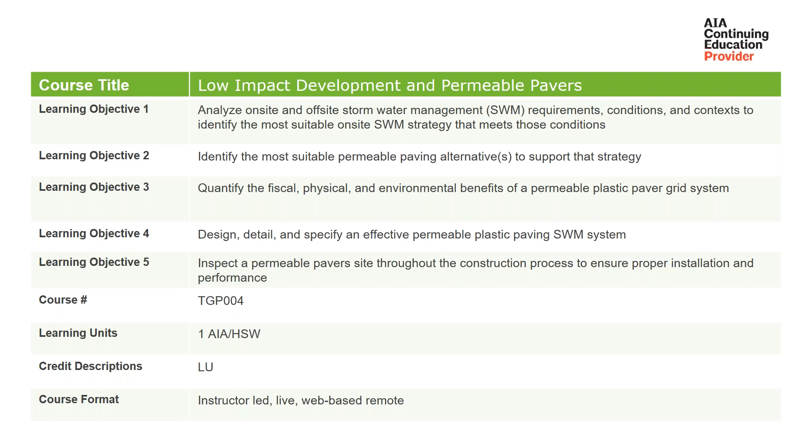Hey, Dustin, I believe you're muted again. Something is going on, I do apologize. I'm getting muted here. I'll keep this. I'm not sure why that's happening.

This is an AIA HSW credit session for 1 hour. Today we'll talk about permeable plastic pavers. We'll look at the health and safety aspect of how they affect the lives and safety of both aquatic life and humans, cleaning the water with bioremediation and other techniques. We'll look at the detention and stormwater detention application of plastic permeable pavers, examine the codes and standards surrounding their use, and look at the cross-section and installation of how we put plastic permeable pavers in most commercial and residential situations. We'll take a look at the advantages of permeable plastic pavers versus other technologies and other stormwater management and LID strategies, look at some case studies, and then wrap it up with hopefully enough time for questions.

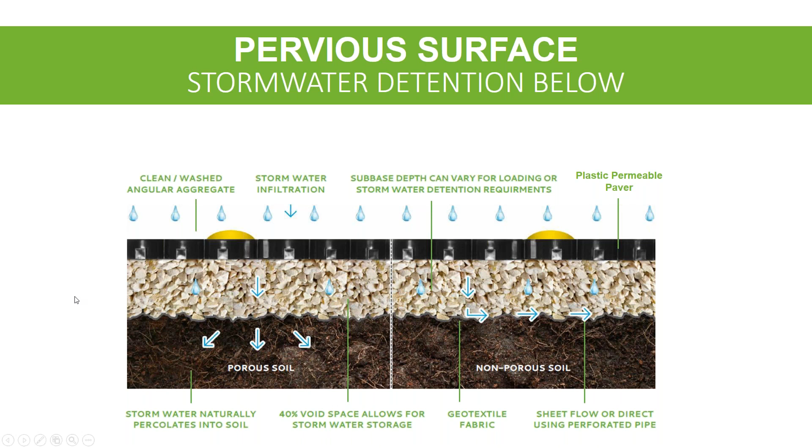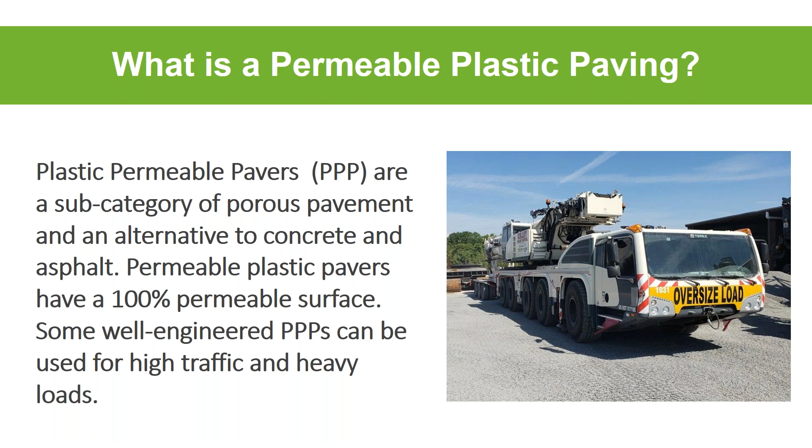Permeable plastic pavers are a subcategory of porous pavement. Since 2016, CSI has recognized us as a separate category, and the correct plastic permeable pavers can be used in heavy load situations, so they're not limited to light duty anymore. There are certain manufacturers and certain systems out there that can accommodate heavy loads and heavy frequency of traffic, so there are a lot of permeable plastic pavers available.

We'll talk about what makes a good permeable plastic paver. There are modular and rigid systems, modular sections, rolled sections, and a lot of different manufacturers out there, and we'll touch on some of the most important components that make your system long lasting.

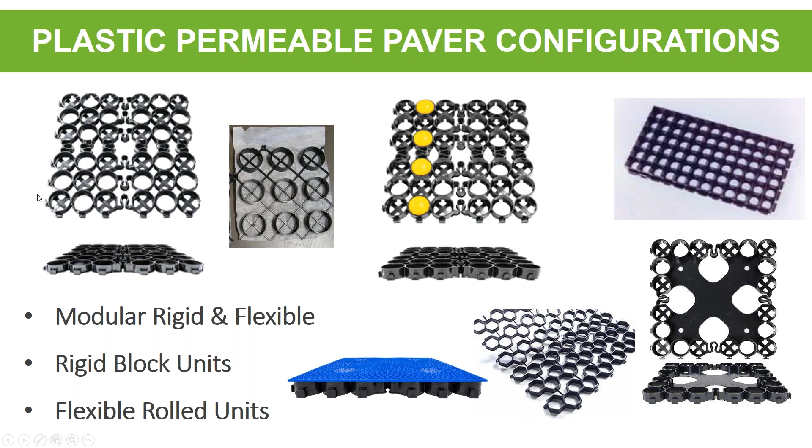A lot of the permeable plastic pavers out there have built-in connectors. This particular one is built in right into the joint without having to use added connectors or third-party systems to connect that.

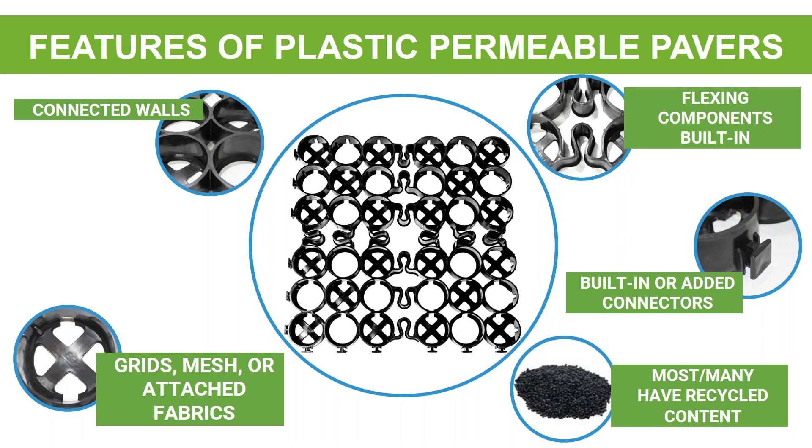Permeable plastic pavers, especially when used with a stone fill or gravel fill, will oftentimes have a grid on the bottom, mesh or attached fabric, and that will help anchor the product down to the base course and prevent any movement. Many manufacturers out there use at least a percentage of recycled content in their resin to get some of those LEED points, which I'll discuss in a little bit.

A permeable plastic paver has a nice focus on safety through the reduction of flooding. You can look at, in many cases, 100% infiltration through the entire surface of a permeable plastic paver. Many of them with stone fill can have very, very low runoff coefficients. In certain cases, you can have a 0.0 runoff coefficient, and even in the worst rainfall amounts, only 5% of that water will convert to runoff. In conjunction with limiting the runoff, that will reduce the off-site water velocities and volume, so all that water is infiltrating right into the system itself.

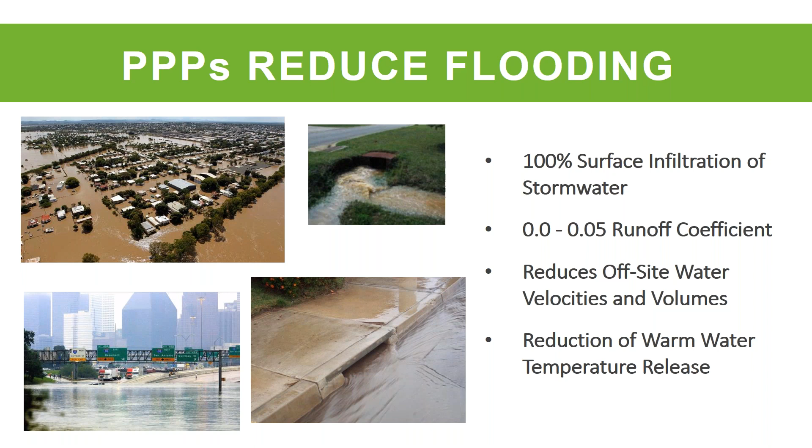With the use of these cooler surfaces, stone fill and grass fill, you have reduced the temperature of that water off-site, decreasing the detriment to aquatic life, so that hot water is not adversely affecting aquatic life downstream.

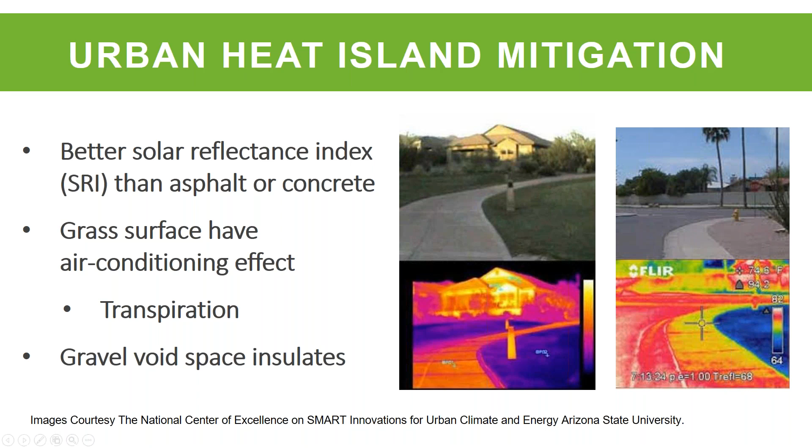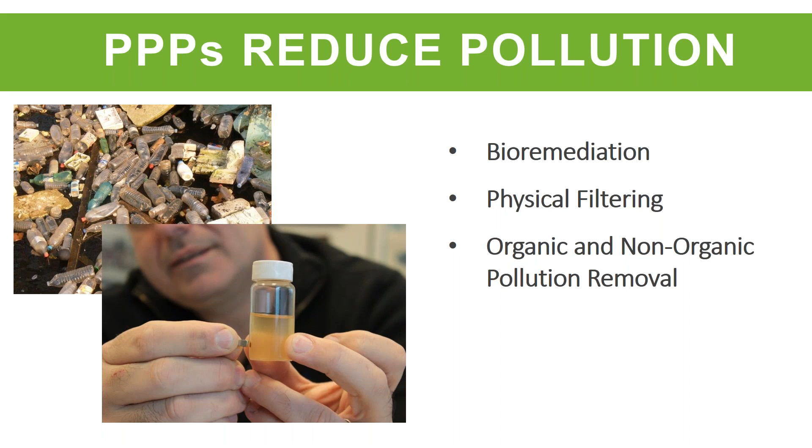Permeable plastic pavers are one of the more effective ways, which I'll get into in a little bit, of removing pollutants from stormwater through bioremediation and through actually physically filtering the contaminants. They remove both organic and non-organic pollution from stormwater.

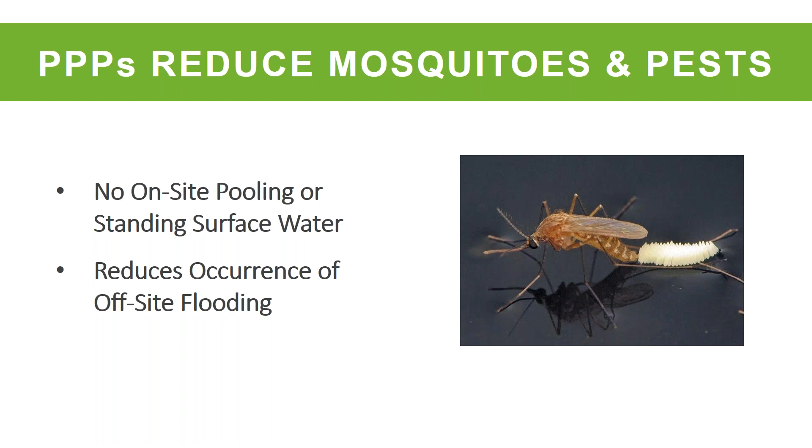Another nice benefit in that health and safety realm would be reduction of waterborne pests such as mosquitoes. There's a great reduction in the pooling of water on site, not garnering the habitat that would promote growth of these pests. It also reduces the off-site occurrences of pooling water, therefore reducing mosquitoes and other pests.

Detention ponds are a very traditional way of looking at stormwater management. They are very high maintenance in comparison to a permeable plastic paver.

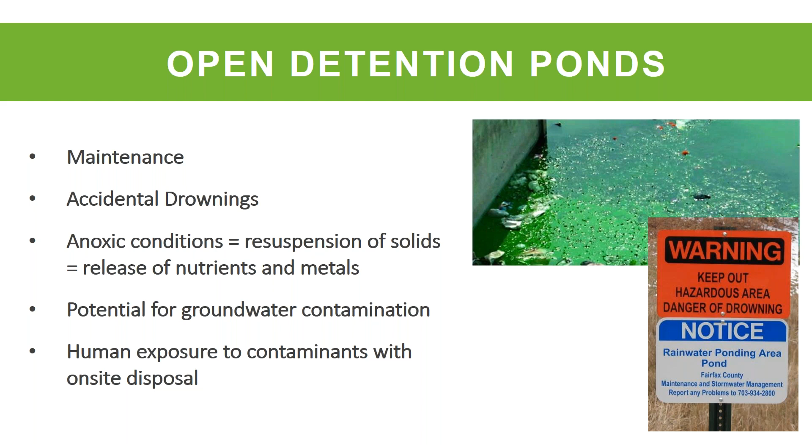There's safety issues, insurance issues, contamination issues for the well-being of both humans and animals, aquatic life. So one major factor in the use of permeable plastic pavers would be the reduction of these detriments via normal use of a detention pond.

Some other primary drivers of permeable pavement would be the environmental aspect and certification. With LEED and other certification methods, there can be a great reduction in stormwater runoff, comparing pre-development stormwater runoff versus post-development runoff. We can manage that stormwater, reduce the amount, and filter it. So that stormwater quality and volume is managed right within a plastic permeable paver, meeting the regulations on post-development versus pre-development runoff through both national and local jurisdictions.

Many designers and customers really like the aesthetic value of a plastic permeable paver with a grass fill or a decorative stone fill.

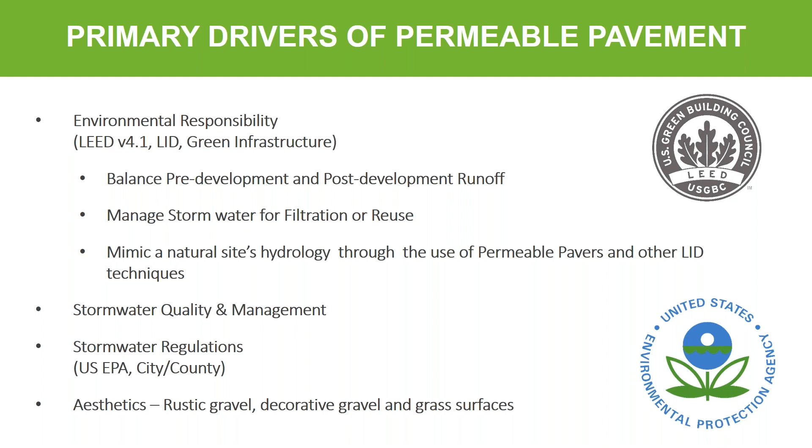As a low impact development best management practice, you have a lot of choices out there - detention basins, grass swales. But what I want to emphasize is that a plastic permeable paver is really best in class at removing those common pollutants: your hydrocarbon drips, suspended solids, normal landscape type chemicals, and even some metals.

If you're going to start with a low impact development best management practice, I would encourage you to look at a plastic permeable paver. It is best in class when it comes to water quality. You can certainly link these plastic permeable pavers to the other best management practices, and we would encourage you to utilize any of these other practices on site. But when you start, you may want to start with a plastic permeable paver.

Along with that last slide, there was a study by the University of Washington that confirmed the previous slide. In comparison to asphalt, a plastic permeable paver system had no traces of motor oil, diesel fuel, or lead, and of the soft metals, copper and zinc, they were very, very low levels. So this plastic permeable paver system, studied in this 6-year example, very well outperformed what you'd see in hard surface pavement.

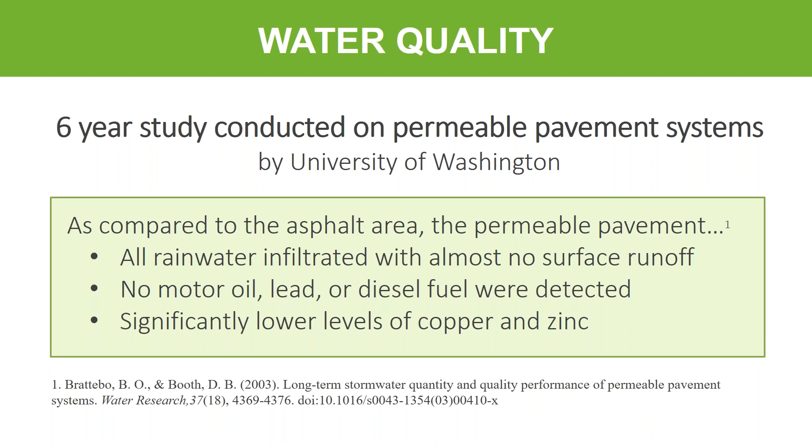With a plastic permeable paver, you can certainly optimize your land use on site. So in the image on the left, you would have a conventional system where you have your buildings in that orange color, your parking lot with traditional impermeable paving, and then a detention pond.

Well, with the use of a permeable paving system, you can reclaim that land that would normally be used up by a detention pond and put in more paving, a building, or some other structure. So by utilizing plastic permeable pavers, you can certainly optimize that land use on site, which I'll have some examples of coming up.

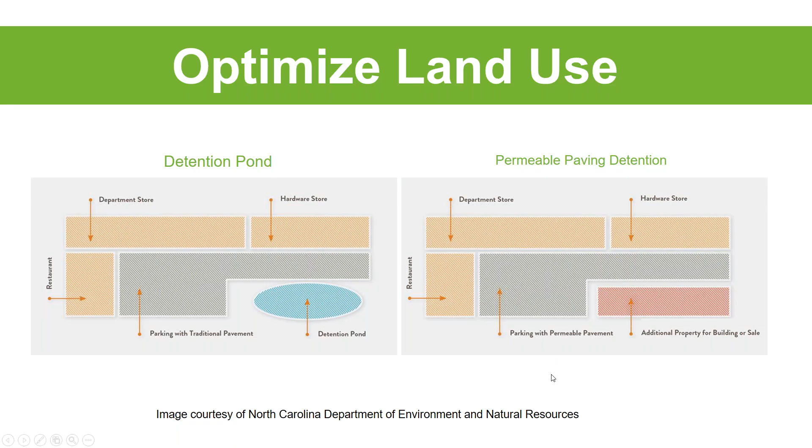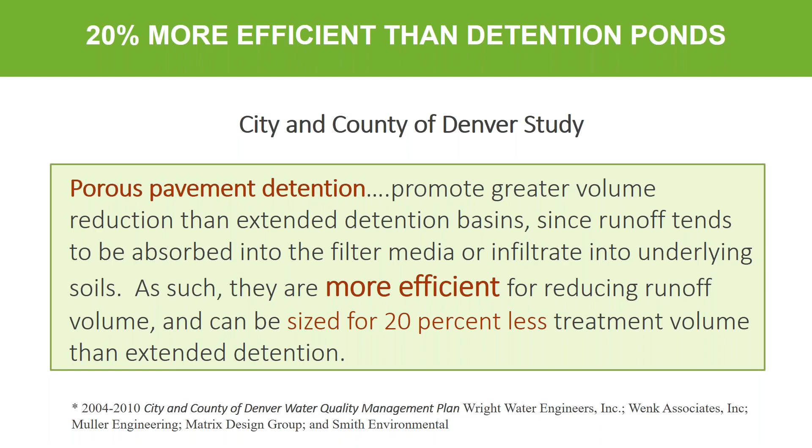In Denver, they did a joint study with the city and county, and they found when you used detention within the cross section of a permeable paving system, you can reduce the volume of water storage that you need. Versus an extended detention basin, they found you can size that stormwater volume storage need 20% less than that extended detention basin. You're not losing water to evaporation or conveyance, and that water is being treated right on site, so there's no need for a larger system.

Many of you may be familiar with an underground piping system to hold stormwater storage. You're looking at pipe systems that, generally speaking, are under asphalt or concrete. In this example, if you are looking at an underground pipe system, there is a lot of excavated volume that is lost and not being used. The area is in that pinkish red color - you'll see the pavement system, the base layer, and the bedding layer. That's all excavated volume required for a pipe system that is not being used for storage.

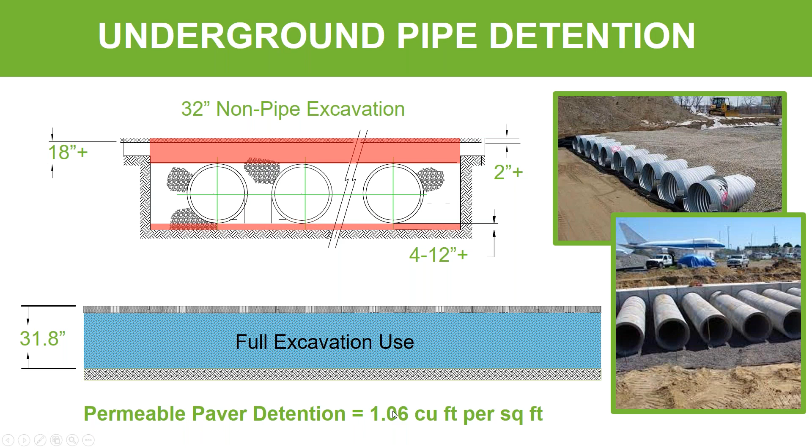Well, if you take that 32 inches of excavated volume for that system, and reclaim it with a permeable plastic paver system, you'll get over 1 cubic foot of water storage per square foot. So by converting this area from a non-porous system to a porous system, you're getting a lot more water storage volume. In one example, this 3,600 square foot parking lot, if you're looking at a round pipe system, you could store about 10,000 cubic feet.

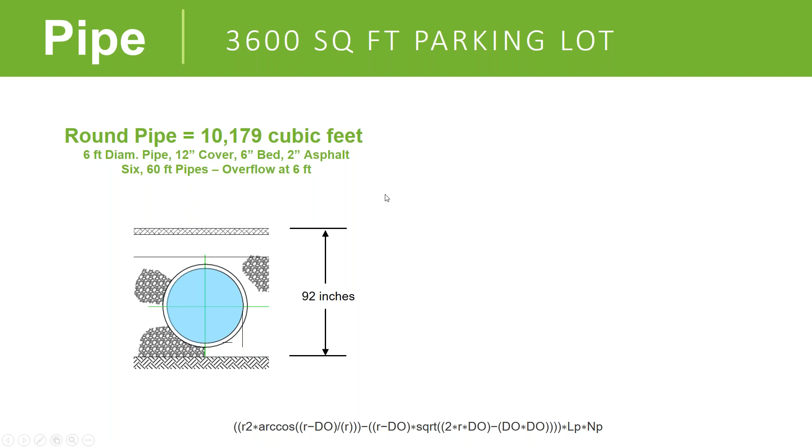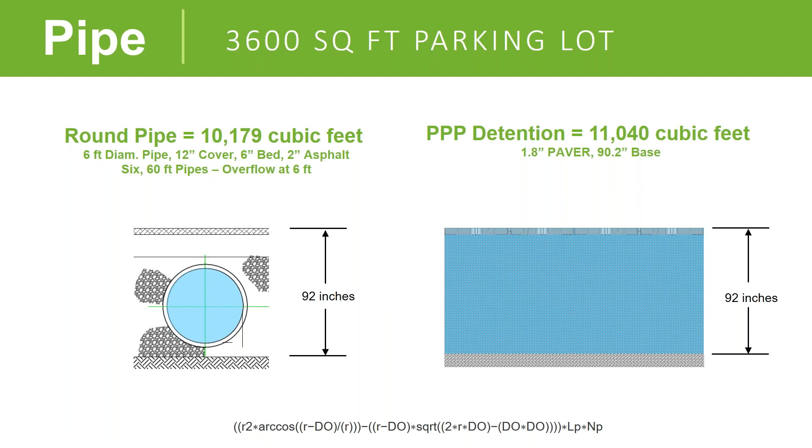Versus if we recovered that 92 inches from this previous slide, you could store more water, get rid of the pipe system, and have a greater impact on stormwater volume storage. In this case, that 3,600 square feet, remember, you're already having to excavate that volume. So reclaim all that volume with a plastic permeable paver, and you'll get an increase in stormwater storage. But you certainly don't have to close that system.

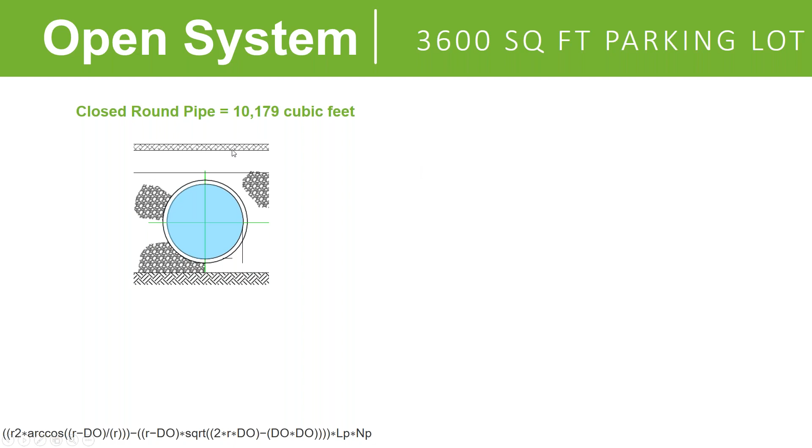There are examples of stormwater storage where a plastic permeable paver can be used in conjunction with an underground stormwater detention system. So in that same example, if you're looking at a 6 foot diameter pipe in that 3,600 square foot, in a closed system, you get 10,000 cubic feet of storage. But if you open that system up with plastic permeable paver all the way down, you'll get a 56% increase in your stormwater volume. You're combining the best of the pipe system and the best of the plastic permeable paving system to get a dramatic increase in stormwater volume storage.

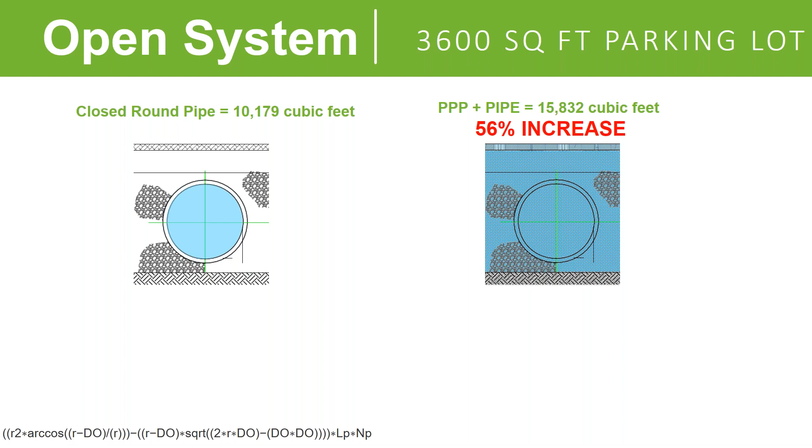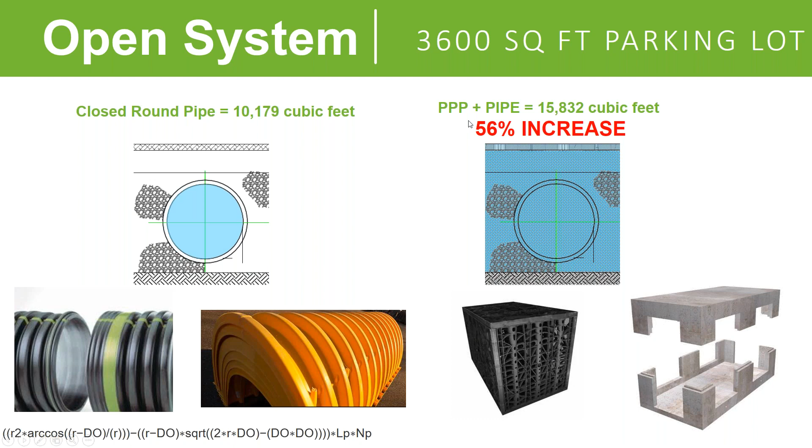And that's not exclusive to pipe systems. You can use arch chambers, you can use modular plastic or concrete systems. Now these volumes will be adjusted per project and per product, but there will be an increase if you work those two systems in conjunction with each other.

A simple calculation for a plastic permeable paver in the detention portion - this is kind of a complicated slide, but it's just saying it's a simple calculation if you're using open graded stone. You'll have your plastic grid paver with your base rock. So all we need to do is multiply the area times the depth times 40% for that open graded stone, and you'll get your stormwater volume of storage in an application. Now this is for a stone infill. This will be reduced to about 20% if you use a grass infill application. We'll get to that in a little bit.

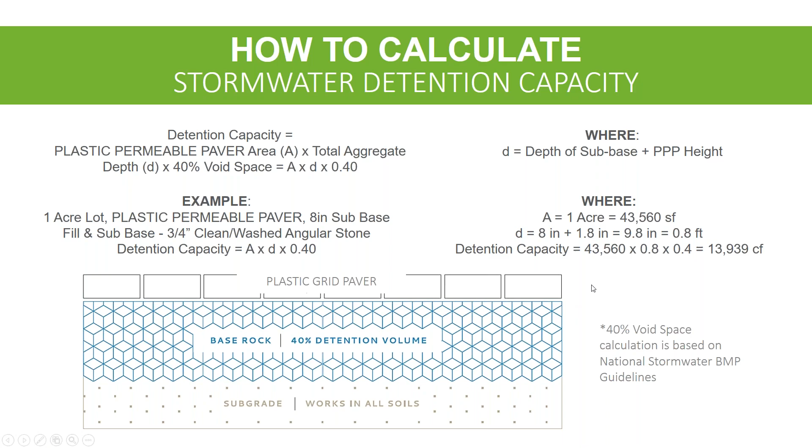In this example, they were using 3/4 inch rock for the fill material, and between 3/4 and 1 inch base rock to get that 40% void space. So almost 10 inches of total cross section, and over 15 acres of that parking lot size, they were able to store 213,000 cubic feet of water in that area - a huge stormwater volume for that acreage. Again, they were able to completely eliminate a detention pond there and have useful space for that inventory lot.

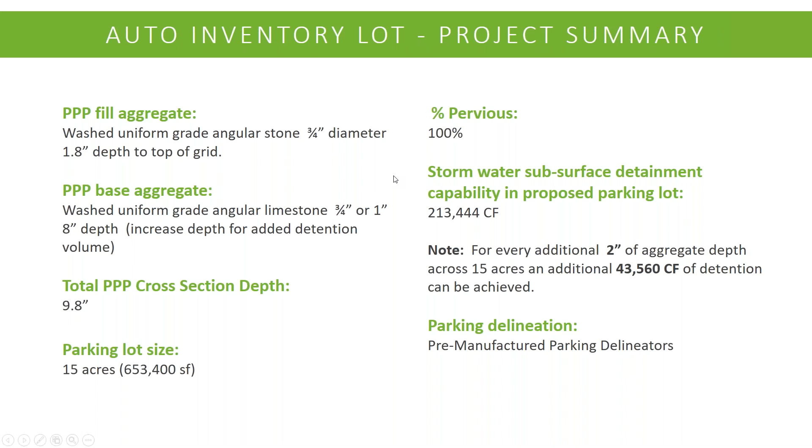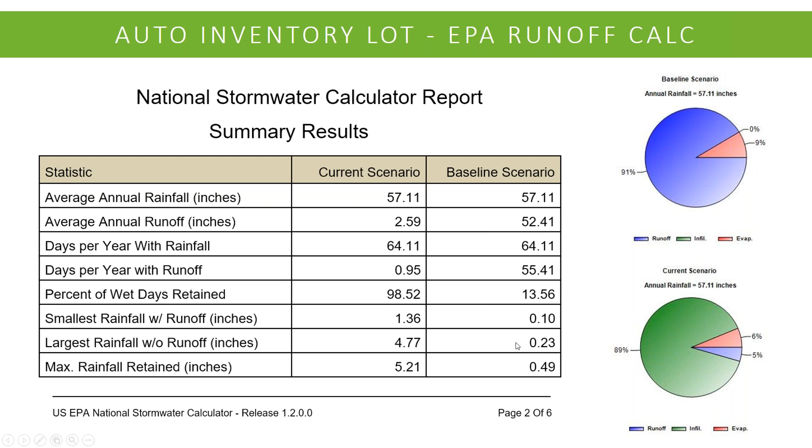In this lot here, you'd have 57 inches of rainfall per year. With that plastic permeable paver, in the current scenario, you're only getting 2.5 inches of runoff per year. And that's only when the rainfall amount is over about 5 inches in 24 hours - so you're not getting any runoff until you're hitting this huge amount of rainfall. If you compare that to the baseline scenario of concrete, with that same 57 inches of annual rainfall, you'd get 52 inches of rain as runoff, and that equates to a lot of volume of water - 213,000 cubic feet.

In this auto inventory lot, there are a lot of environmental benefits. This particular product was made from 100% post-consumer recycled plastic, equating to 860,000 pounds of recycled plastic. That 213,000 cubic feet of water equates to about 1.5 million gallons of water storage right in that cross section.

Compared to concrete, the manufacturing of concrete has a huge effect on CO2 emissions. By utilizing a recycled content product, they were able to reduce their CO2 emissions by almost 4,000 tons in this one project.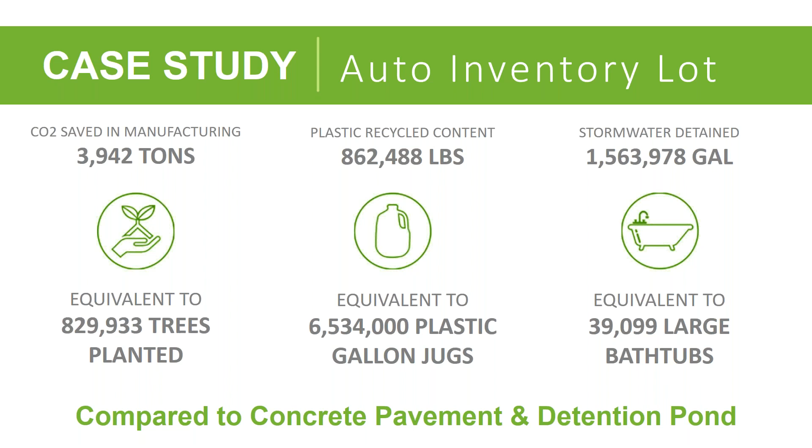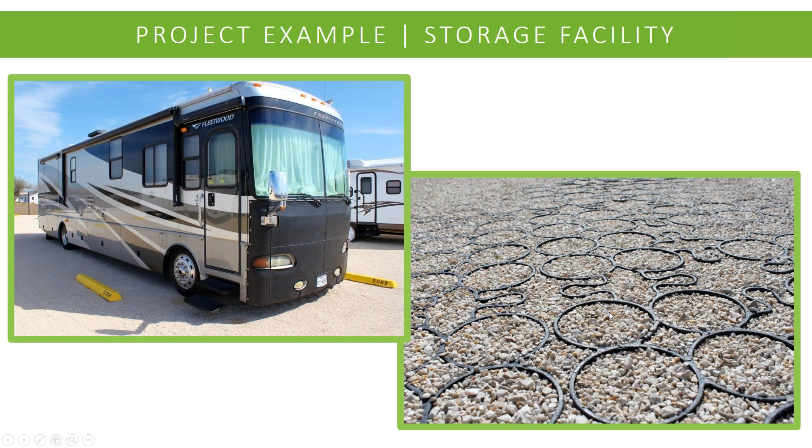Another example here, a more practical financial example, would be a storage facility, a pretty good size site of 11 acres. They were originally looking at concrete with a 2.5 acre detention pond, but by coming in with 250,000 square feet of plastic permeable paver, they were able to eliminate that 2.5 acre detention pond completely, using a plastic permeable paver filled with an open graded stone and an open graded base layer.

In all the cost savings in this example, the first line is they were able to eliminate the construction of that detention pond, saving $140,000. Then these other components you need in stormwater conveyance and quality—the pumps, the drainage, the grates, the curbing, and all those other piping methods—were completely taken out, saving almost $190,000.

Then the direct surface savings versus concrete in the first phase and second phase, all combined by removing that detention pond and using that plastic permeable paver, saved $1 million in installation versus concrete. Now, that's not the whole story.

One of the nicer elements is that this is a rental lot, a storage facility renting out RV spaces, etc. By eliminating that 2.5 acre detention pond, they were able to garner 120 new rental spaces, and the projected lifespan of that plastic permeable paver is 25 years, even greater than concrete.

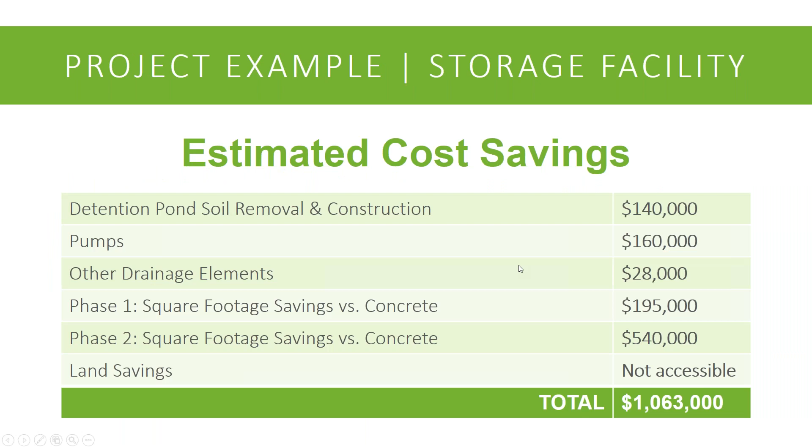So you're getting 120 new rental spaces. Multiply that out, and you're getting $4 million in revenue in this example versus a detention pond and concrete system. If you add that $1 million installation savings and $4 million of revenue, the turnaround in this project is $5 million over 25 years.

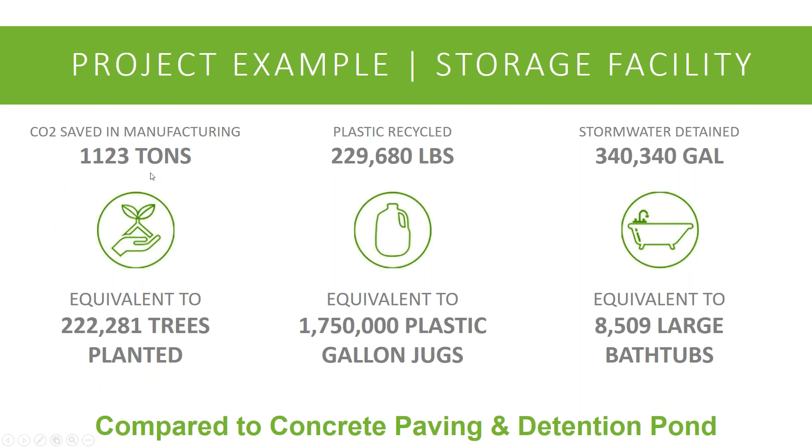And again, a huge environmental impact. This particular product was 100% post-consumer recycled plastic, giving 230,000 pounds of recycled plastic credit. That's a lot of water—that 2.5 acres of detention pond is approximately equivalent to 340,000 gallons. And the savings in CO2 emissions versus concrete there is 1,100 tons.

Since 2016, the Construction Specifiers Institute has recognized permeable plastic paver as its own category, so I'd encourage you to look in that section for your permeable plastic pavers. When designing, those of you who are designers listening today, I'd encourage you to use that number in your master spec. Contractors may encounter the old spec 02795 and other related older specs with different numbers—they fell generally under flexible plastic paving, but now since 2016, I'd encourage you to look at 32 14 33.13.

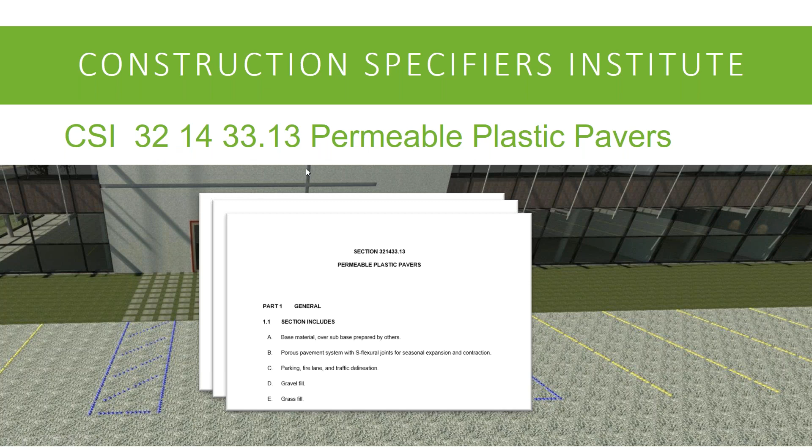Another major component of permeable plastic paver is getting LEED credits on your project or other sustainable green development credits for different accreditation. You can look at water quality, controlling water quantity and volume, cleaning that water, urban heat island, which we talked about a little before, and recycled materials, and pollution prevention. There are some other minor points, but these are the four major categories I'd encourage you to look at if seeking some kind of green certification.

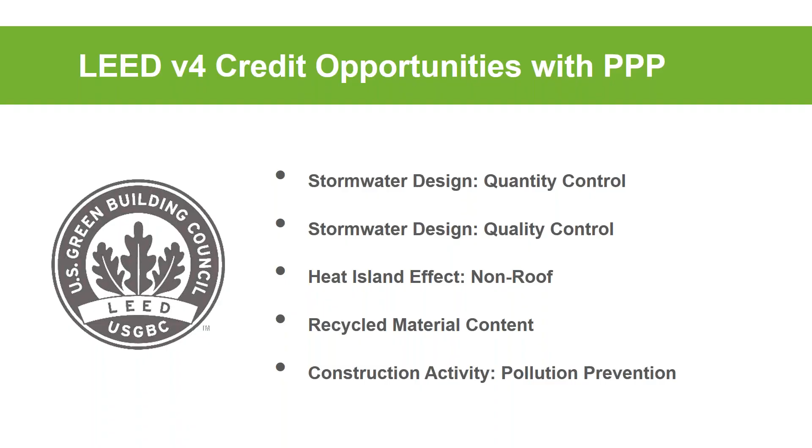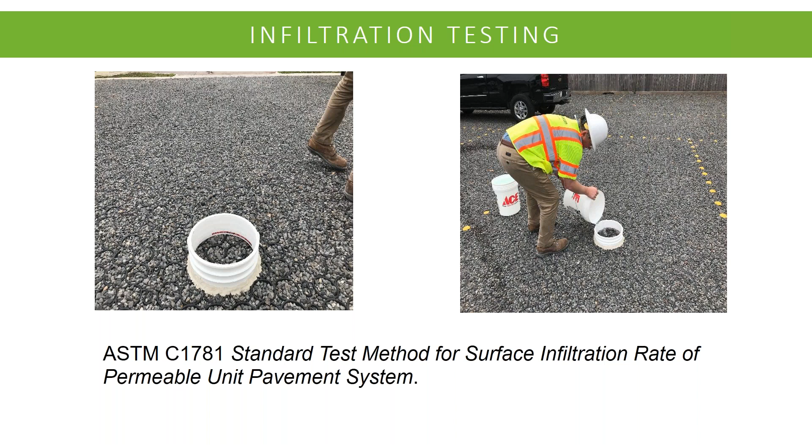I mentioned a little from that video the tremendous infiltration rate of some of these systems. Permeable plastic pavers, just in the way they're developed, have extremely high infiltration rates, and there's an ASTM test for measuring that. These systems are scoring above 1,300 inches per hour infiltration, which is a vast rate—there's no real rainfall amount you'd encounter that these systems, if designed and installed correctly, could not infiltrate. That's where they get their great runoff coefficients and infiltration rates from this measurement.

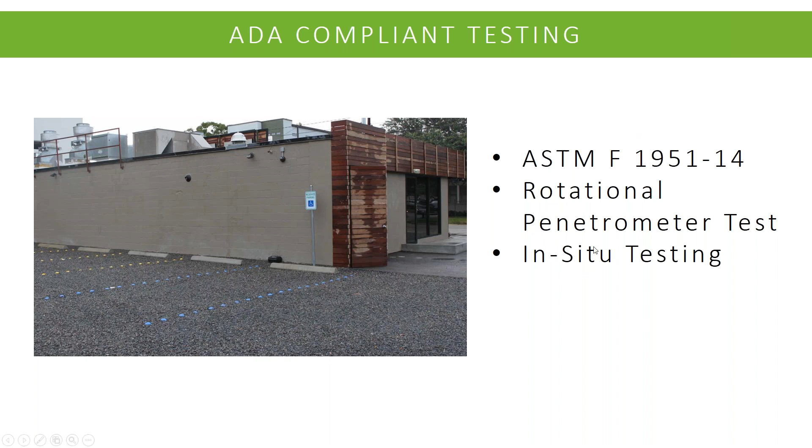When you're designing, I would encourage you to look at products that have ADA compliant testing methods out there. There is an ASTM test, and also a different test, a rotational penetrometer test measuring the wheelchair force and turning force of wheelchairs. There's also some local municipalities that will want some kind of in situ testing from sites that have already been developed. So ask the manufacturer if they have those available when you're designing an ADA space in your parking lot.

Recycled content is a big driver for LEED points, but also, if you're looking at some of the developers and even on the residential side, the homeowners, they love the environmental aspect. Many manufacturers of plastic permeable pavers will take your common HDPE products, high density polyethylene products, crush them down, grind them up, put them through a pelletizer, and the good ones will add a carbon black UV filter. So I would encourage you to look for plastic permeable pavers that have that UV protection, that long-lasting UV protection involved.

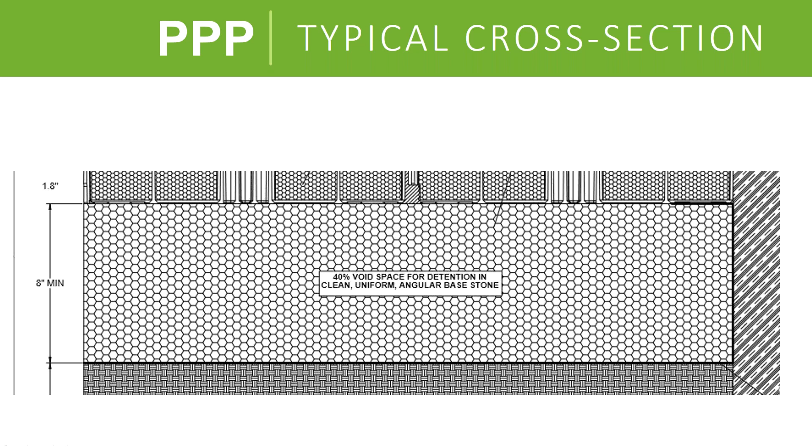Now on the commercial side, this would be a typical cross-section for a commercial parking lot. You would have approximately a 2-inch paver with an 8-inch base for most of those loading needs. As many designers know, on any pavement surface we're looking at a geotextile fabric between that compacted subgrade and the base layer. In this case, it's the darker line getting wrapped up here and around the top. So approximately 10 inches of cross section in most commercial situations. That will depend on the subsoils and other factors, but this is a very common application.

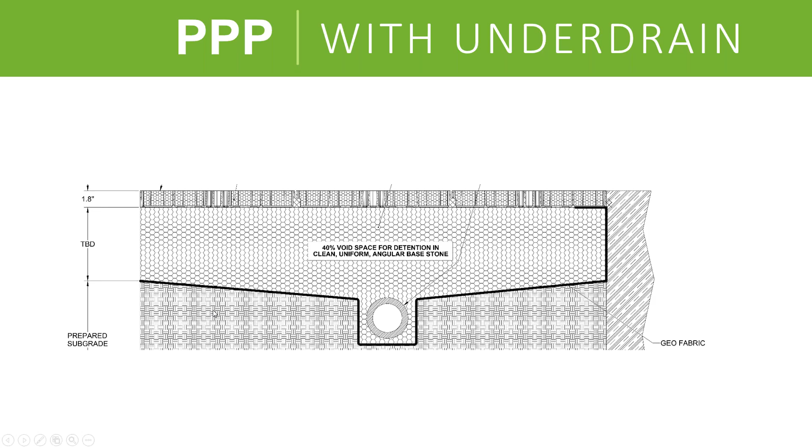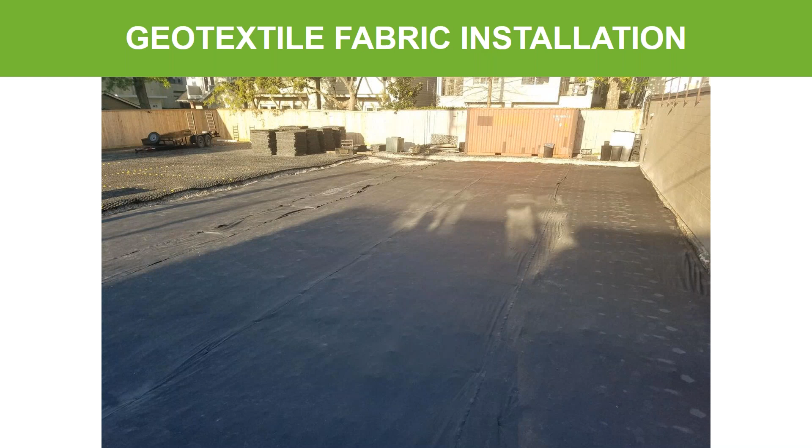So we're looking at really an excavating depth commonly of that 10 inches, which I showed on that cross section. This excavated volume here going down 10 inches, then proof rolling and compacting that existing soil there. Then laying down a geotextile filter fabric or a geogrid, depending on the use there. It's not required by all manufacturers, but it is encouraged to get more stability and keep that pavement system stable. It's no different than a lot of what you're seeing in highway design for concrete or asphalt, getting that fabric there.

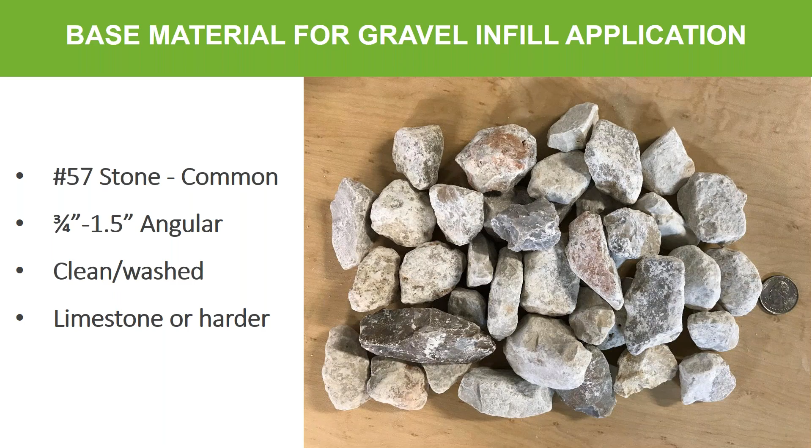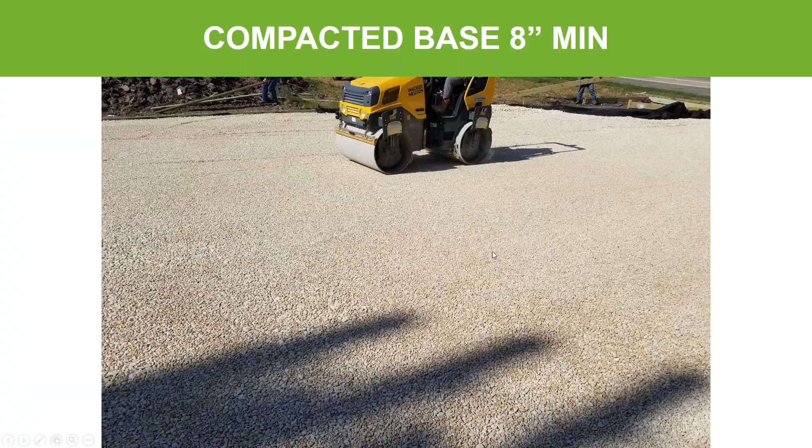In your base course, to maximize your water storage volume and get all the qualities of stormwater management that you need, we'd look at a nice open graded stone to get you that 40% storage by volume. You'd be looking at anywhere from 3/4 of an inch to 1.5 inches. Clean washed is the best—that will alleviate dust problems, etc.—and then a limestone or harder aggregate to support that load. So you'll compact that, on the commercial side usually an 8-inch minimum. Compact that in lifts, use that roller, align that rock in 4-inch lifts or 6-inch lifts, but 8-inch minimum on that depth.

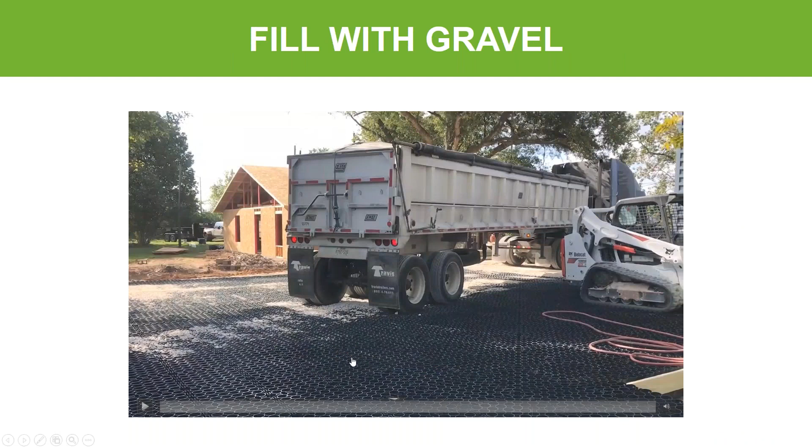Then many manufacturers have pretty easy installation. Certain ones can just be stepped on and aligned and stepped on there to lock in, but you're looking at placing that plastic permeable paver directly on that rock. There's no bedding layer, there's no other fabric in this case, so it's pretty easy to get that installed. And in this case here, I'm going to play this video.

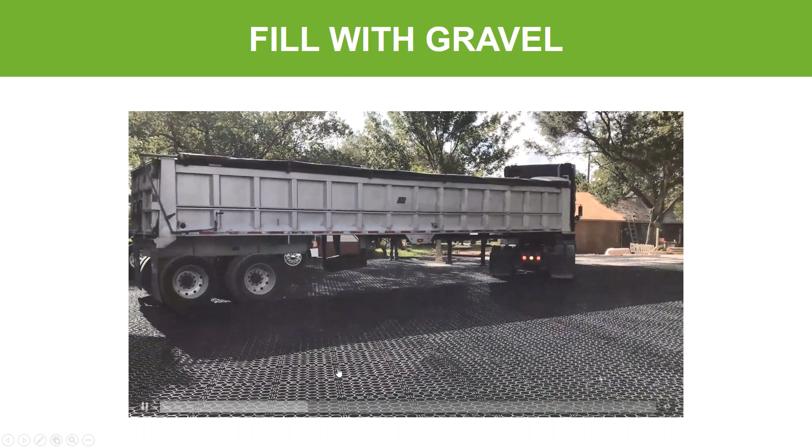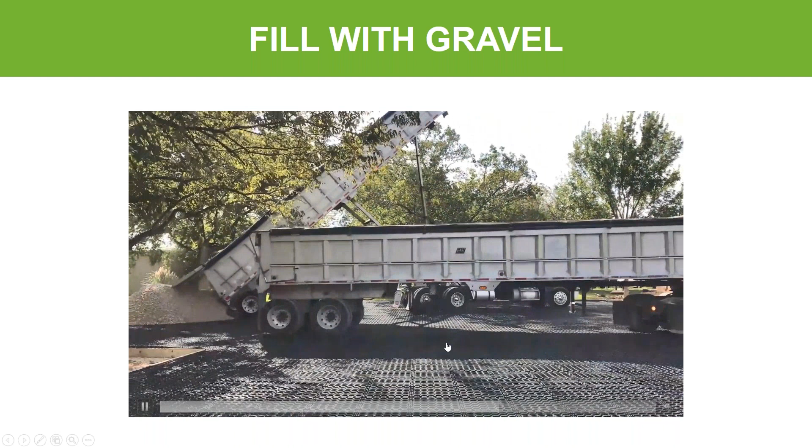This is how they're bringing in their fill material, driving right on this product. This particular product can withstand that load even empty. So make sure the manufacturer of your plastic permeable paver can do this, but they're dumping that gravel right on there and filling it in quickly.

Very swift. And what does that fill material commonly look like? Again, an open graded stone, in this case a 67 stone. This range works really well. I'll get into some options later, but for your stormwater volume and containment, this is what you want to look at: 1/2 inch to 3/4 inch size. Again, clean and washed, and the harder stone to reduce any chances of pulverization and dust.

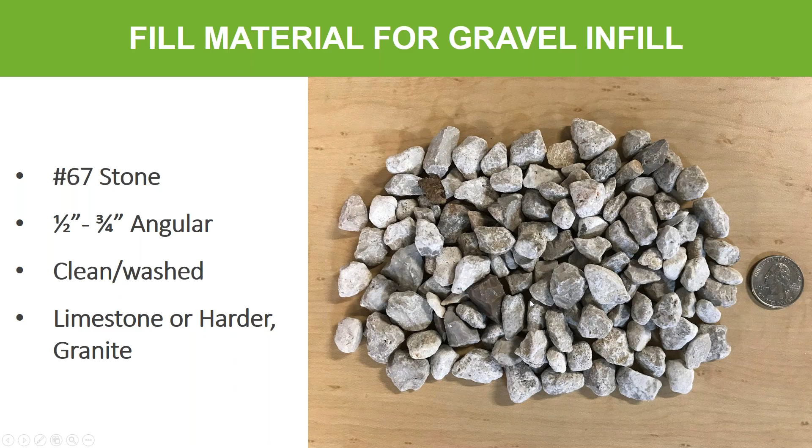Now, when you're doing a grass system, which I'll get into in a little bit, the base material needs to be a little bit different because it needs to grow grass, it needs to support heavy loads, and it needs to drain. So to support living grass, you'll need to look at a 3/4 inch minus sandy gravel material.

And this sieve here in your upper right, this happens to be a Nebraska standard. I like this one because it's an aggregate base that they have for asphalt, but this will be nice for growing grass. It has enough fines, the passing 200, to keep that drainage and grass growth there. So if you're looking at a 3/4 minus, if you can keep those fine levels between 3 and 7, 3 and 8, and certainly under 10, that's a good level to make sure it drains and grows grass.

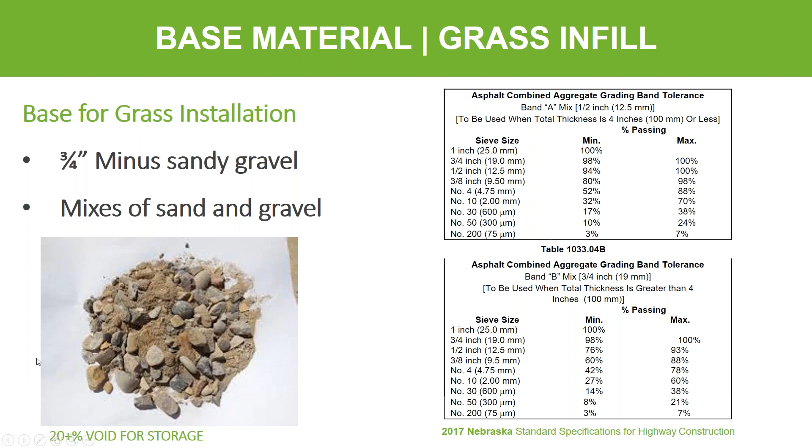One nice aspect is it still has a water storage capability that is reduced from about 40% down to about 20% in that storage volume, but it still will store water in that cross section. And then your grass fill, your sod or your seed, which goes on top or inside.

There are different methods for installation, but in this example, that thin cut sod is going right on that, looks like a little sandy loam grass there.

Depending on where you are, you can use many different grass types. In the northern cold climates, blue rye fescue works really well. And in the south, zoysia or Bermuda. You can use a St. Augustine, but those roots, those rhizomes, grow sideways. So it still can be done. I encourage you to ask the manufacturer what is the best grass for their particular product.

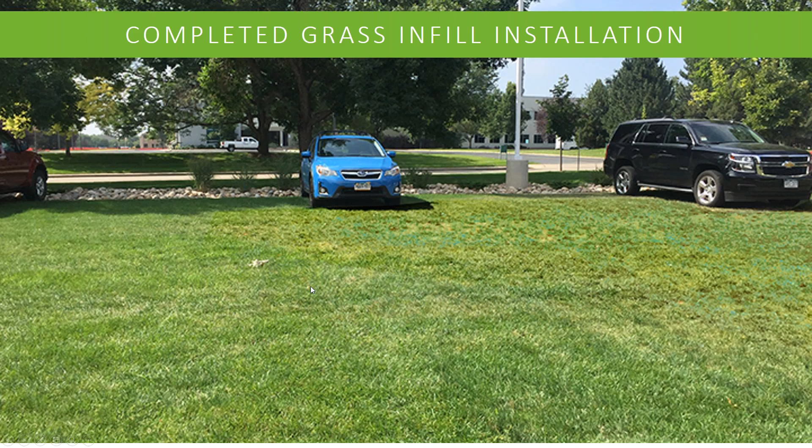Here's just an example of what a grass parking lot would look like. You get 100% with these plastic permeable pavers, 100% grass coverage. There's no checkerboarding as you'd see with some competitive technologies.

So one benefit of these plastic permeable pavers is both the option of, really the same product, having a grass fill or a gravel fill, stone fill application. That gives you versatility. The grass fill on those low frequency parking lots or fire lanes, and then for higher frequency, you can look at the stone fill.

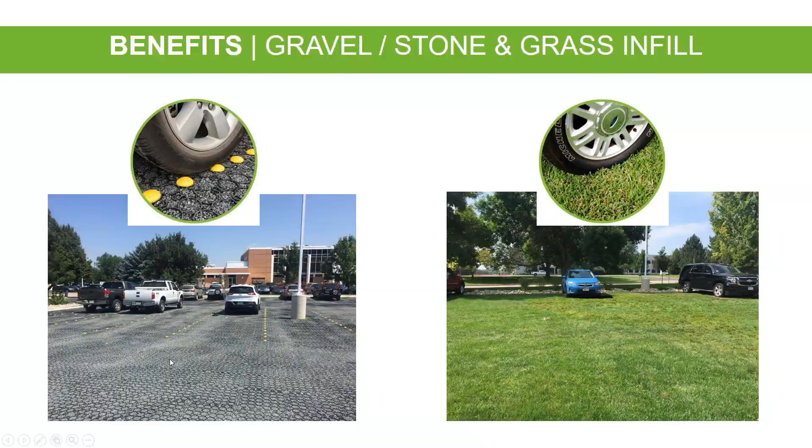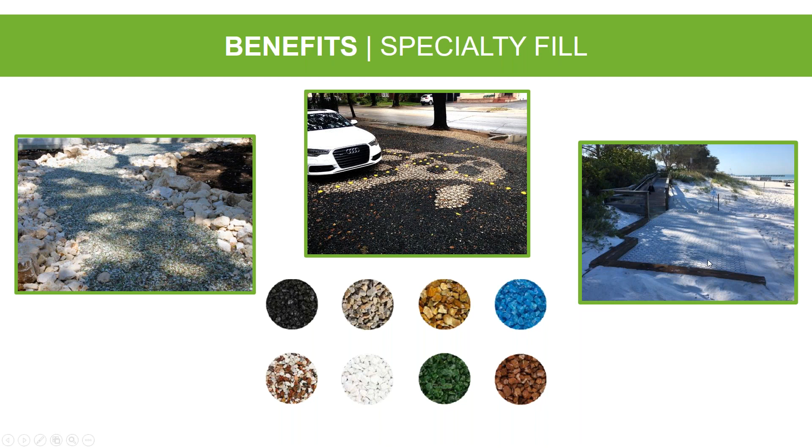If you're not looking to drive exactly stormwater management, or only need a minimal amount of stormwater management, you can look at alternate fill methods in the products. The photo on the left is recycled glass cullet, and this photo doesn't do it justice, but that really sparkles in artificial light, so at nighttime that's a beautiful application. You can mix and match fill materials, different colors, and the photo on the right would be looking at some sand fill, existing soil fill. So you certainly can look at those for non-stormwater management applications.

There are manufacturers out there that offer delineation and signage accessories to get you the striping, the ADA parking markers. Certain manufacturers have reflective markers, different signage types, and in northern climates you can look at flat markers that can be plowed, snow shoveled, or snow blown without affecting them. In southern climates you can look at raised markers to get a little added visibility, or mix and match whatever you need.

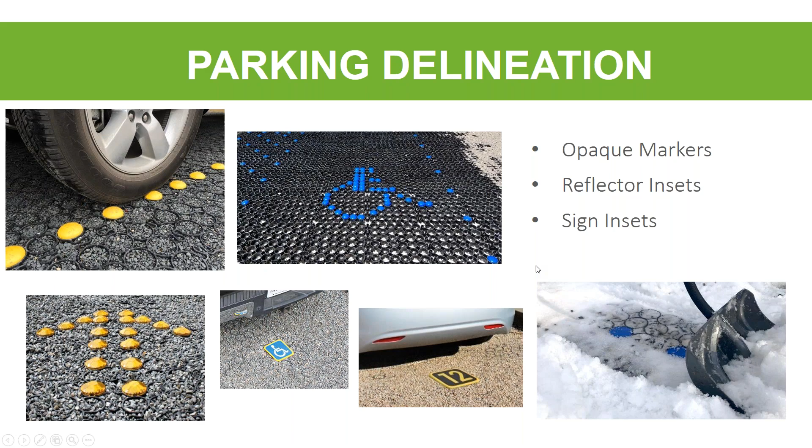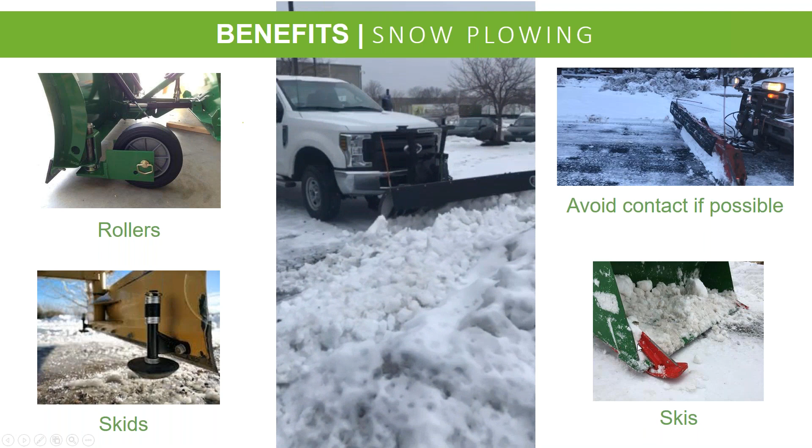This is no different than asphalt, right? You don't want to put any undue pressure on that plastic permeable paver. So while it can take this type of plowing, we'd encourage you to train your plow driver or maintenance person to raise that blade up.

One of the benefits of a plastic permeable paver is the ability to melt snow and have less occurrence of ice versus a concrete or asphalt system. Because precipitation lands on the unit's surface, it will start to immediately melt or not get stuck on the system, so you have less occurrence of snow and standing ice. You can reduce your use of chemicals and salts, and when you compact snow down by driving on it, it does not turn to ice as often. That's one nice benefit of a permeable paver.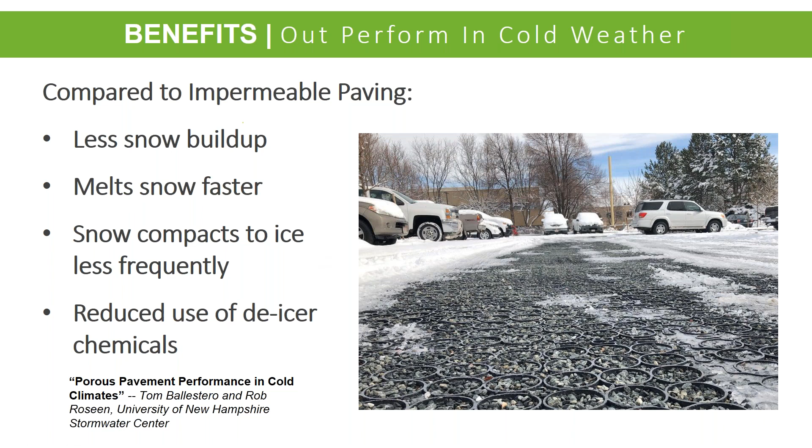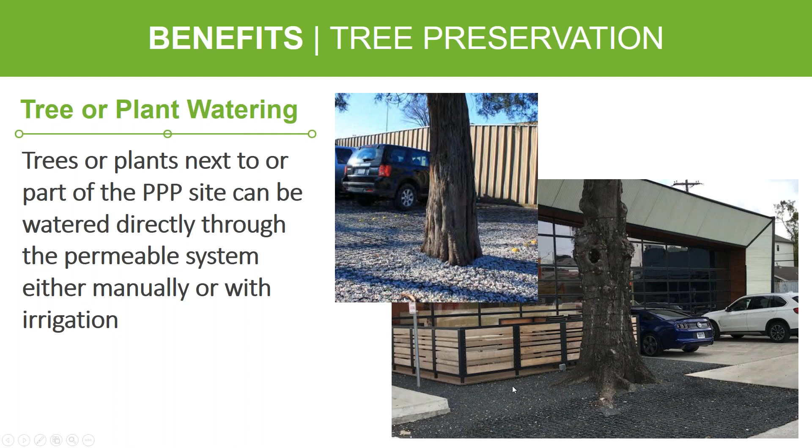A great benefit some designers look at in existing site redevelopment is keeping those old growth trees. You can bring this type of pavement, a plastic permeable paver, right up to the trunk of the tree and keep that tree alive. You're not suffocating it - there is transference of water and air, oxygen and CO2 moving up and down. So unlike an impermeable surface, you can keep that tree alive, and unlike other competitive technologies, a plastic permeable paver can go right to that trunk.

One great benefit of using a plastic permeable paver is dust reduction for large equipment yards. You can avoid having dust kicked up and avoid having to use tackifiers or water as often.

And again, you're saving on maintenance on the equipment as well. You're not kicking up dust, so you have to wash vehicles less and have less maintenance on that side.

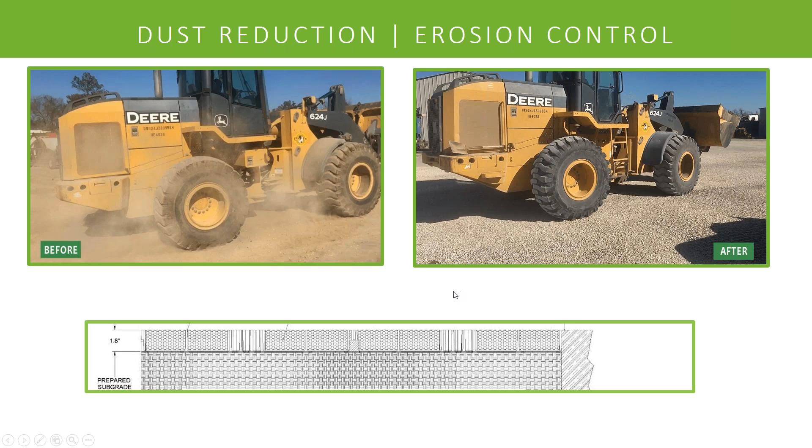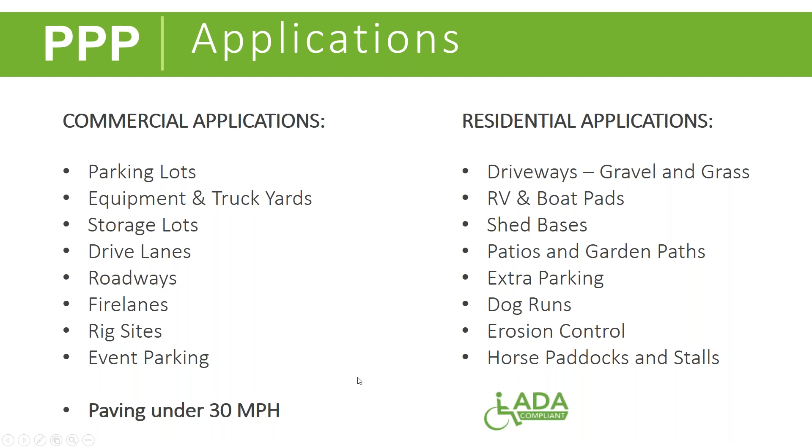On the commercial side it's pretty limitless - parking lots, yards, roads, drive aisles, fire lanes, etc. And there are so many residential applications as well. If you're a residential designer, you can feel confident that these types of systems will work very, very well. So where does this go?

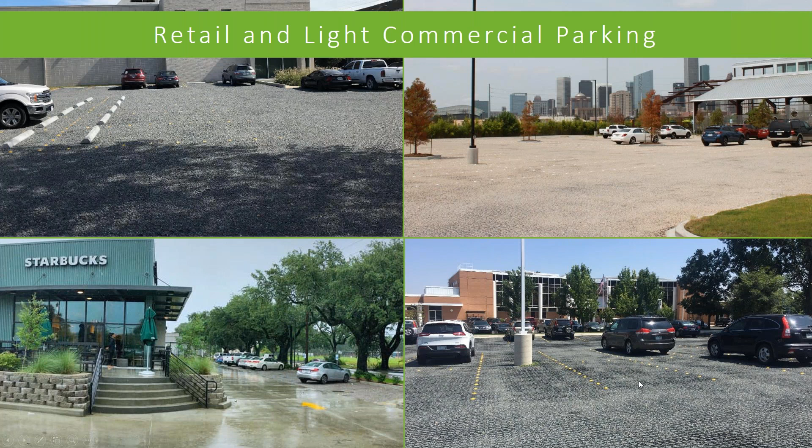Well, one common area is retail and light commercial parking. In the lower left photo, you have parking bays in a plastic permeable paver with stone fill, and then sheet flow off concrete to get you that stormwater detention. The lower right photo shows a lot of employee and visitor parking. And for less frequently used areas - event parking, apron parking, lower use applications under 5 passes per day - you can use a living grass system.

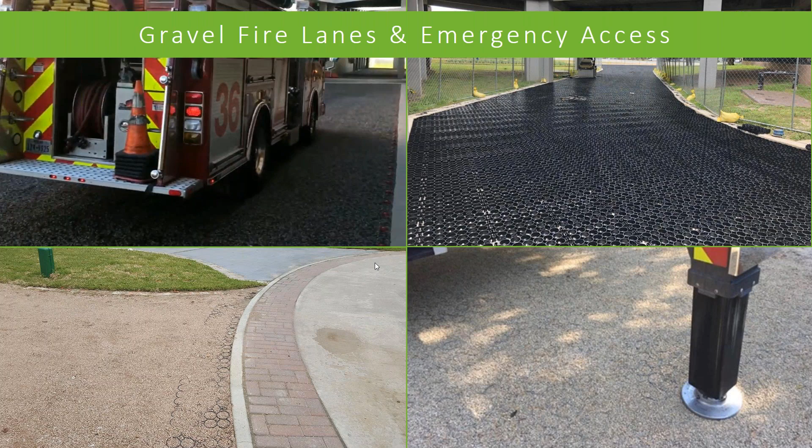And then you have gravel fire lanes. If you have water restrictions in a certain area, I encourage you to use that plastic permeable paver - it's still suitable for a fire lane. You can still get a nice permeable surface and have a reduction in urban heat island mitigation.

Airport taxiways, aprons, those types of things - you can keep your air park open even in rainfall, so the aircraft can taxi back and forth to their parking spaces without getting stuck in the mud. Quite literally, you can be open and taxiing in almost any rainfall event. So helipads, that type of thing, I encourage you to look at that. Keep that air park open almost every day of the year.

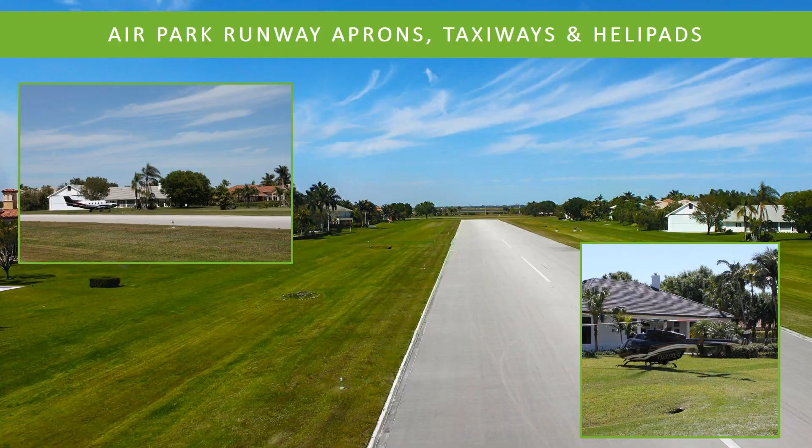Reducing your impervious surface for utility access is a very common application for these plastic permeable pavers. You get high compressive strength, which I'll get into in a little bit, but it's a very good application for the product. Then municipalities - they're looking at reducing their stormwater use and reducing their costs.

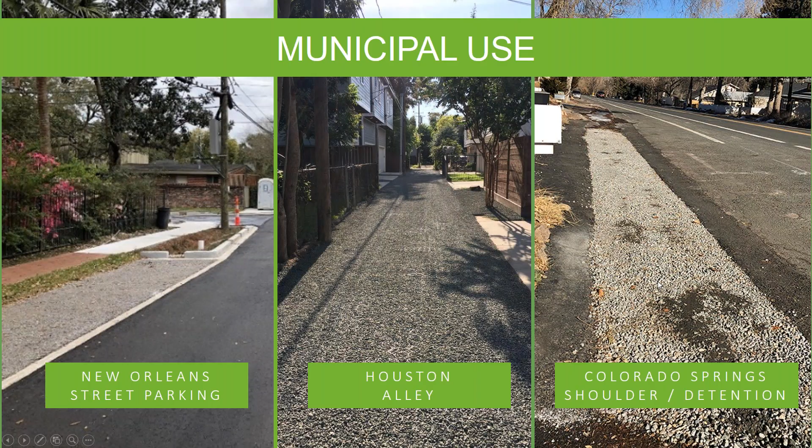Here on the left, that photo shows on-street parking all over New Orleans with the plastic permeable paver, where the asphalt is crowned to drain into it. You could use alleyways, like in the center picture in Houston or in Colorado Springs. You can use isolated incidents too - this is mountain runoff directed right to a detention system with plastic permeable paver. And if you want the aesthetics of grass, you can still have infrequent off-street parking with a grass application.

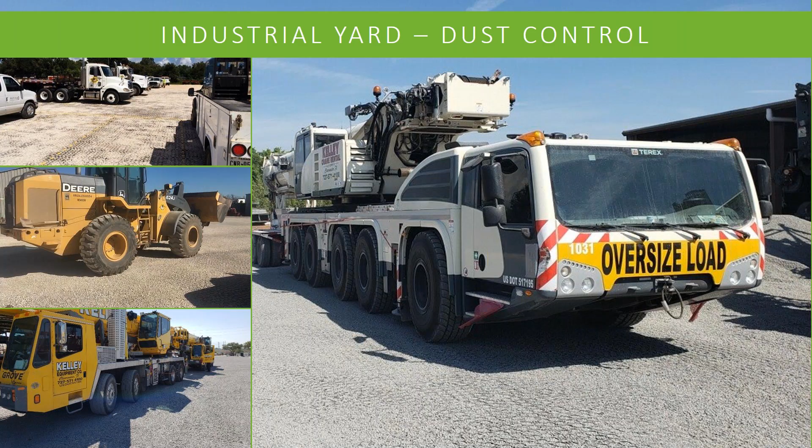Heavy loads are not a problem for some of these products. I encourage you to look at their strength and capability, but it's not limited to trails, light cars, or golf carts. With the proper design and the proper product, you can use these in heavy use areas.

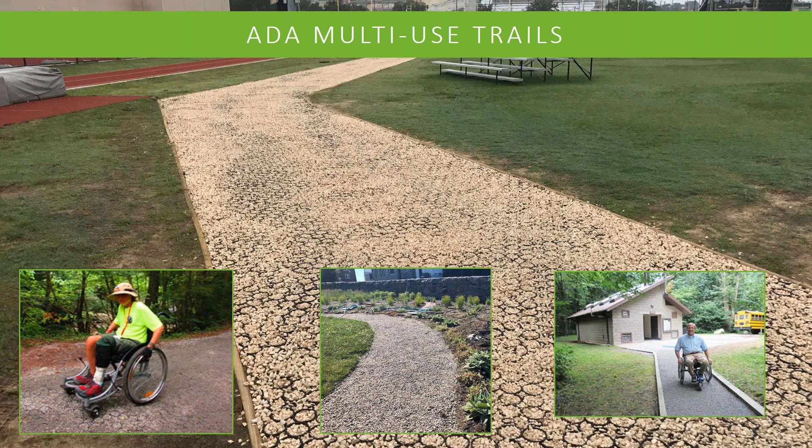ADA use - I mentioned testing a little bit here, but it's a great application to get that rustic look with a stone fill application, and get the ADA compliance that trails, parks, cities, and schools need without the cost incurred with hard surface pavement, while also getting the drainage and erosion control benefits.

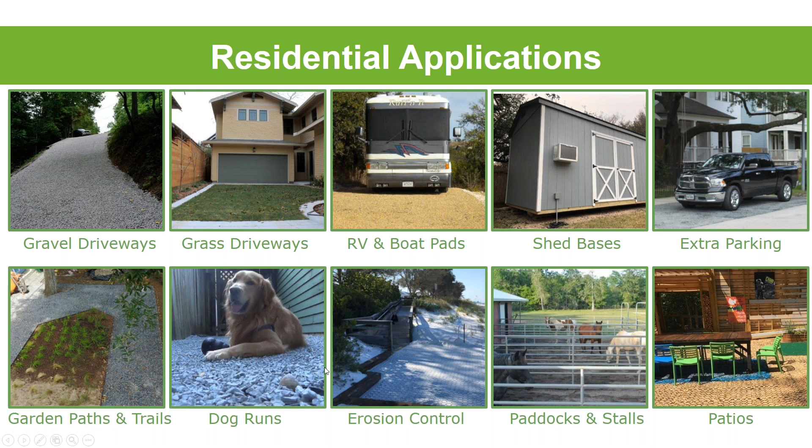Pedestrian areas again - architecturally or design-wise this may be an aesthetic value, but it's also a stormwater value. And around the house, really, you have unlimited uses. There are products out there, shown in the lower right here, that are strong enough for horse applications, so you can look at certain ones for that. But really, driveways and a lot of different applications exist for these plastic permeable pavers.

So I'll wrap it up for some questions here. Hopefully I didn't take up too much time.

You get the benefit of a pervious cover all the way where a plastic permeable paver is - the whole entire area can infiltrate. One of the biggest low impact development benefits is you get a very high detention volume within the cross section, so you can store a heck of a lot of water with the right design and the right product.

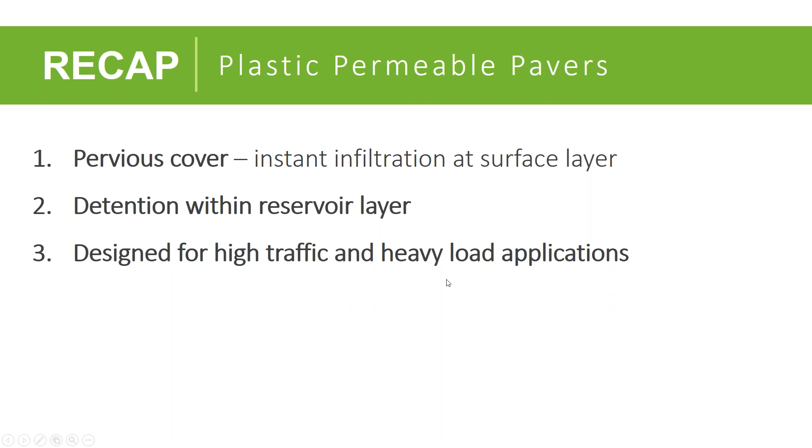Many of these products have come a long way and are engineered now to receive heavy loads that you could not have seen 20 years ago with these types of products - providing safety, flood mitigation, low impact development, and protecting the lives and safety of property, people, and aquatic life.

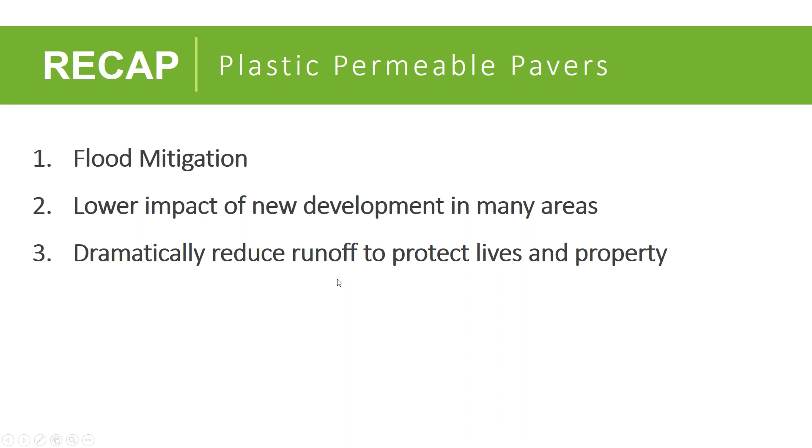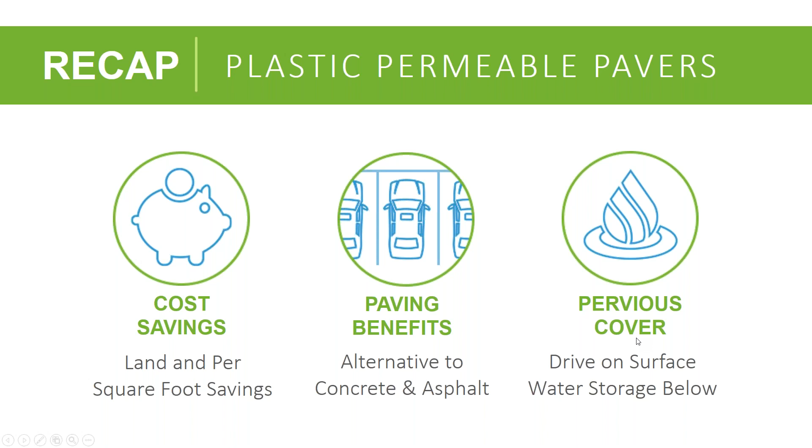So some great benefits - you can certainly save money versus other technologies, but land use is a big one. You get a great alternative to concrete and asphalt, with the benefits of a plastic permeable paver and the strength capabilities you're used to with concrete and asphalt. And of course, you get a surface that is beautiful and can store water below. So that really concludes it - I'm open for questions here.